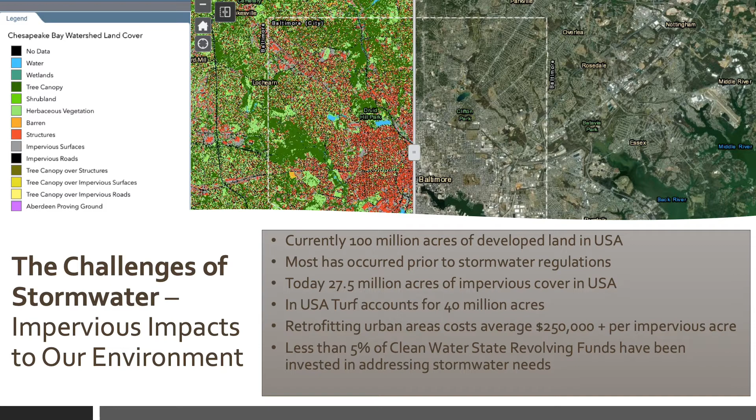With over 40 million acres in the U.S., few would know that grass represents our largest agricultural crop. In the Chesapeake Bay region where I'm located, we have seen a tripling of grass to nearly 4 million acres since 2009, representing 10% of our total watershed area. The millions of acres produce a significant amount of polluted runoff each and every year. This polluted runoff is a result of highly compacted soils, fertilizers, fossil fuels, and irrigation water. This amount of unused grass areas offers tremendous opportunity for biochar to assist communities in meeting their EPA stormwater requirements.

Often when we see green yards and fields, we immediately assume that they have the ability to infiltrate and store rainwater. However, in most cases they provide little infiltration or storage and are often just as much a contributor to runoff and pollutants as the impervious areas. While receiving little attention to date, turf offers a tremendous opportunity to become part of the solution through an aggressive urban soil carbon restoration program that can provide numerous environmental services while saving communities millions of dollars and meeting their EPA stormwater permit.

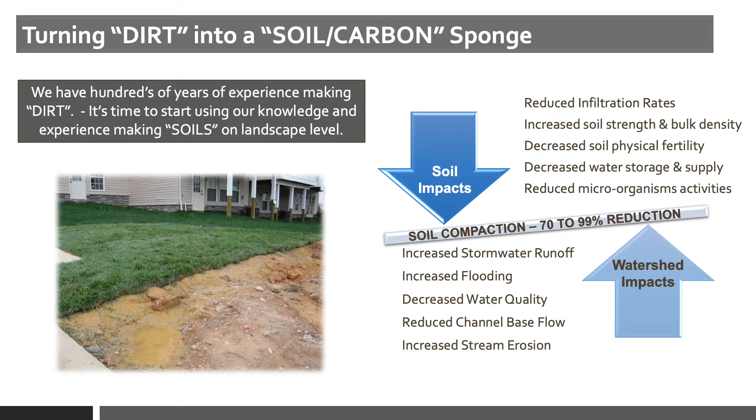I'm going to go out on a limb today and assume that stormwater and green infrastructure might be a new topic for many. As with any industry, we have buzzwords, acronyms, and definitions. Two that should be explained include green infrastructure and hydromodifications. Green infrastructure is the latest buzzword related to stormwater management around the country. Basically, the approach is to manage stormwater runoff using natural systems and/or engineered systems that mimic natural systems.

The objective is that by using distributed green infrastructure, urbanized watersheds shown primarily in scenarios B, C, and D in the slide can be restored to mimic scenario A, woods or meadows in good condition. In order to achieve this objective, the project must first maintain pre-development runoff characteristics of either a meadow or woods in good condition, usually computed through hydraulic modeling, maximize disconnection of impervious surfaces, and use many small non-structural treatment systems.

As our environments become more impervious, the natural hydrology of the watershed is modified, increasing peak flows, runoff volumes, and generating flashy flow events. For scenario D, which is nearly all impervious, much of the runoff flows off the landscape into storm drain systems as fast as possible to avoid flooding. Without the vegetation, evapotranspiration declines, and little to no infiltration occurs, eliminating groundwater recharge and natural cooling effects.

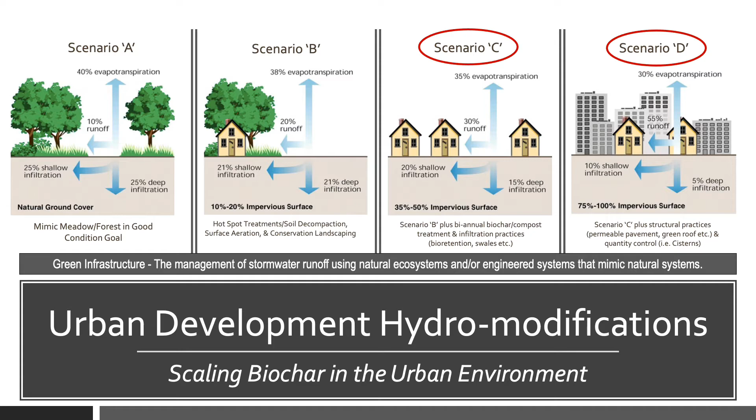Let's now transition to discussing biochar as part of a stormwater management strategy. In the beginning, much of our biochar efforts were associated with enhancement of engineered bioretention media for bioswales, bioretention basins, and rain gardens. In 2012, working with the University of Delaware, we began to evaluate the potential to modify soils in situ to mimic what we were finding in the biochar enhanced engineered media. In 2014, the research team received an EPA and a Transportation Research Board grant to study the potential benefits of amending soils along highway greenways.

The pilot areas were very small, capturing runoff along a 3-lane highway with two 6-foot by 20-foot treatment areas. A third area just captured roadway runoff. Both treatment areas were tilled to 12 inches, or 30 centimeters, with one being amended with 4% by mass wood biochar. Each test plot captured the same amount of impervious area.

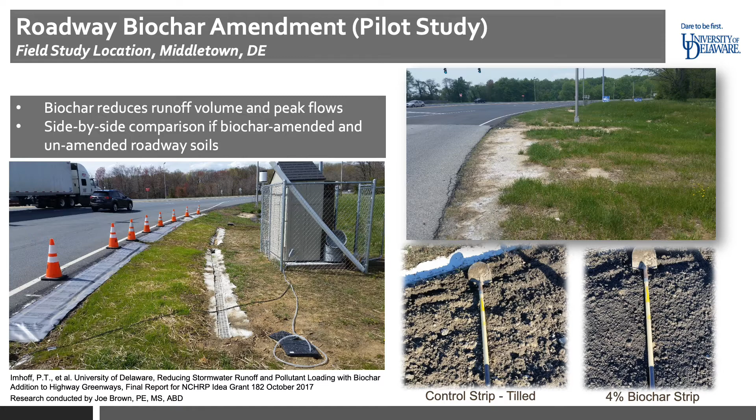After a year and a half of data collection, the study showed significant peak and volume runoff reduction. The biochar amended soils provided an average of 77% reduction in peak flow, while volume was reduced by about 53%. For peak flow attenuation and runoff, tilling provided very little benefit compared to the addition of biochar for the sandy loam soils. As would be expected, study results will vary based on soil types.

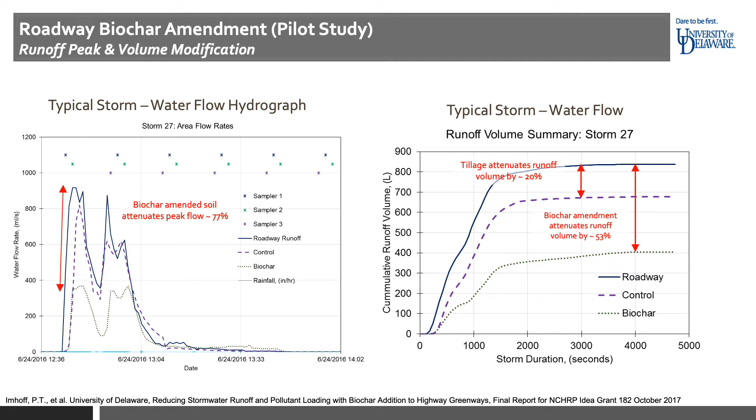Currently, the University of Delaware is working on a soil biochar model to better determine the amount of biochar to be used and predict how it would respond in a given soil.

An exciting aspect of the study, based on data collected from 84 storm events, was the ability to capture 100% of the runoff from 85% of all the storms that occurred during the study by amending just 12 inches.

An interesting finding from our efforts was that only 9 inches of the amended soil were actually being used to capture the majority of the storm events, and only during bigger storms were the remaining 3 inches used, which then became surface flow. This was discovered during a mass balance quality control check and confirmed using multidimensional flow modeling by an independent team.

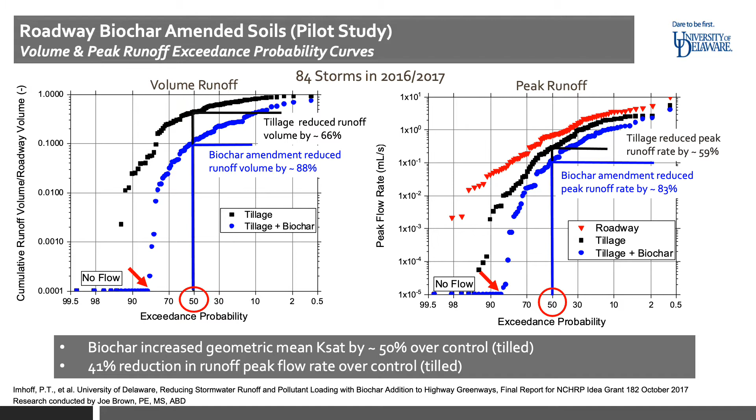One of the coolest findings during the study was the effect of biochar on soil temperatures. The addition of biochar into the soils helped to moderate the overall soil temperature extremes. Based on literature review, it appears the soil temperature moderating may be due to the combination of increased water holding capacity as well as microbial activity.

The results indicate the soils warm quicker and cool slower, temperature extremes are limited, and more extremes can be found in the spring and summer than in the fall and winter.

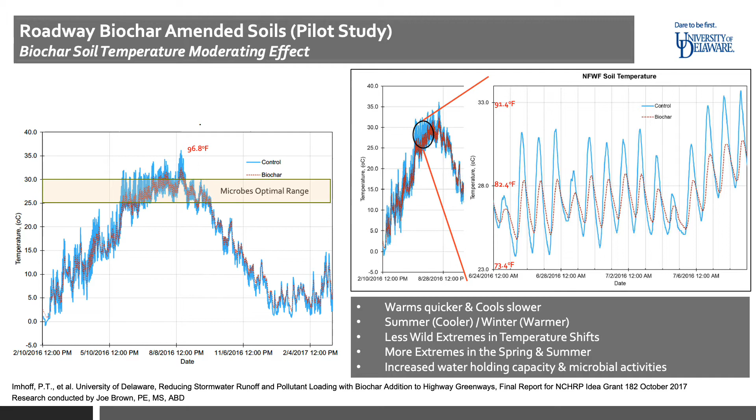Upon completion of our first highway pilot project, efforts moved to the installation of larger demonstration projects, primarily along highways for a variety of transportation agencies.

The I-95 Toll Plaza project was recently installed for the Maryland Transportation Authority, led by the University of Delaware and construction partners this past summer. As part of the effort, means and methods for installation as well as material specifications were developed.

Lessons learned from previous installations incorporated a number of additional steps. One such critical item is that biochar must be moistened and allowed to absorb water prior to tilling into the soil, or it will not incorporate evenly throughout the entire soil profile and will primarily remain on top. Adding the moisture also helps reduce biochar dust, which is critical for safety, especially along busy highways such as I-95.

The other change we made as we began to scale up operations was the use of a specialty harrow tiller. Most rotary tillers can only go down 4 to 6 inches and will pull up a lot of rocks. The power harrow is able to get down to 11 inches and minimize the exposing of rocks while blending moist biochar into the entire soil profile. The harrow made the installation process go quicker and provided for a cleaner final product.

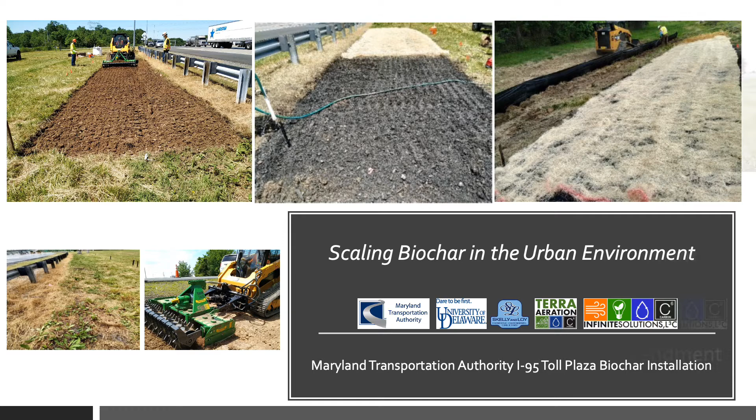To date, the largest biochar project we have done was the conversion of a third of an acre of grass to an infiltration basin. Within the basin, the soils were amended down to 2 feet to better capture runoff from an 8-acre drainage area with a 3-acre parking lot. In order to get the highest performance credits, the amended soils needed to function more like an engineered bioretention media, which averages 80% sand, and have it infiltrate without the use of underdrains.

The project is heavily instrumented with a complete weather station including rain gauge, relative humidity, temperature, wind speed and direction, evapotranspiration, and solar intensity. Groundwater surface wells were installed to monitor the rate of storage as well as time to completely infiltrate. The soil moisture and temperature probes have been installed at 6 and 12 inches, both in the amended and non-amended soils.

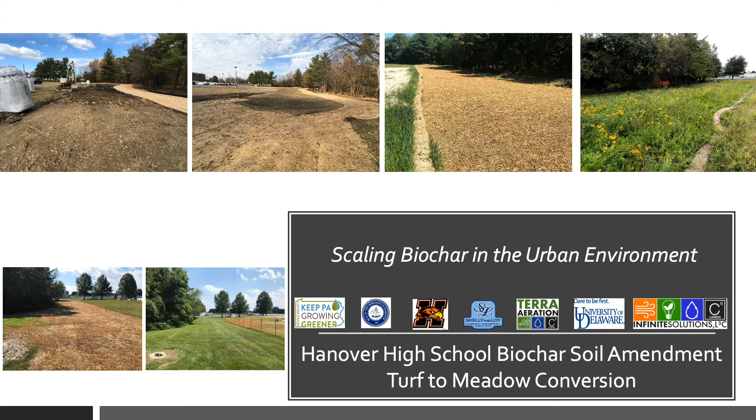As we continue to add to our project experience, we have been experimenting with installation processes to cover a variety of situations and of course make it as efficient and cost-effective as possible. As it relates to treatment and equipment usage, there are 3 primary techniques currently being employed based on the amount of water management we're targeting.

Surface treatment for non-hotspot areas uses a very common turf management strategy to increase infiltration, aeration, and turf health. It is recommended that biochar or a blend of biochar, compost, and fertilizer be spread after aeration. This is important to consider to ensure that the turf remains an even color and thickness throughout the site. This treatment allows for more infiltration, water holding capacity, and nutrient management right at the root zone.

To infiltrate larger storm events, like a 2 to 5 year event, then the deeper harrow tiller must be used. On most projects, the average amount of biochar has been 4% by mass, but we are currently testing effectiveness of using only 2% by mass to see if we can get a similar result for less cost. Depth of treatment can also be easily adjusted with the harrow and makes quick work of soil amending and turf replacement. Lastly is the pneumatic soil decompaction technology.

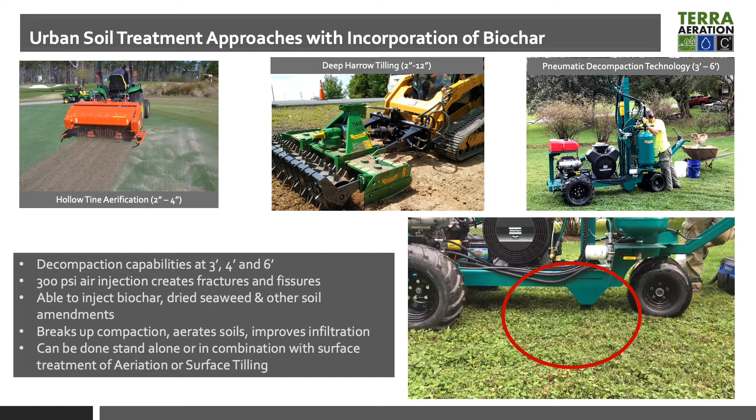I'd like to see if I can get a video to play so you can see the equipment in action. Let's give it a little bit of sound. Get the real effect. As you can see, the ground lifts up at that point after the air was injected.

As part of our work, let's now take a look at how scaling up biochar and urban soil restoration can have a major impact on a larger watershed scale. At this time, we are in the early stages of scaling up from pilot and demonstration projects. So obviously, the more projects we get under our belt will yield more data on the effectiveness of urban soil restoration practices. However, based on what we have learned to date, we can take a hypothetical view using similar modeling studies to evaluate biochar's influence beyond a pilot site level.

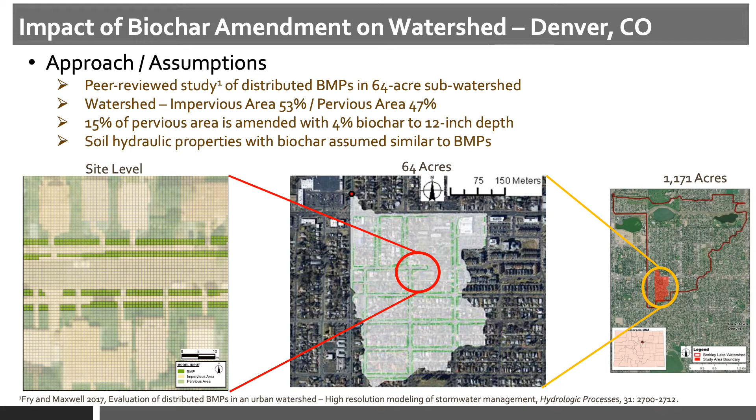A recent paper by Fry and Maxwell provides a similar framework to look at the potential benefits of a broad-scale urban soil restoration program. In the original Fry and Maxwell study, existing poorly drained soils were removed and replaced with sandy loam mix. Our evaluation took this approach and modified the data, assuming the addition of 4% biochar treating 15% pervious area.

At a site level, impervious disconnection is paramount to achieve runoff objectives. The research models have demonstrated that the most effective practices include downspout, sidewalk, and driveway disconnections, deep soil decompaction, and green patches often found between the road and sidewalks.

Additionally, most houses are graded to drain toward the public roads, thus increasing the volume of runoff that has to be managed by community infrastructure. Thus, short-circuiting those flow paths will have a major impact on the total runoff from the site.

Studies have also shown that most individuals do not want to give up their grass for green infrastructure practices like bioretention facilities, rain gardens, or even conservation landscaping due to maintenance and loss of space or the perceived loss. Yet, for municipal engineers and regulators, these green practices are the primary tools for on-lot treatment. Additionally, considering the majority of the available land is privately held, there is no way to mandate their acceptance.

Access to these private properties can be difficult, and so more innovative approaches are needed to gain access to these areas, like maybe a stormwater fee elimination and/or a subsidy/tax credit towards a brand new yard. Investing in increasing the ability of a lot to infiltrate and hold more water through the incorporation of biochar has shown great promise at a smaller scale, and we have no reason to assume different results when scaling up.

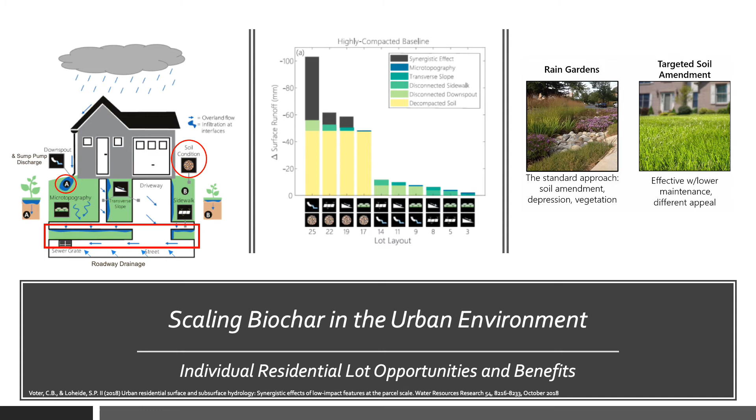An additional selling point to landowners and community leaders is all of the other benefits, including reduction in water usage, waste upcycling, carbon sequestration, microclimate temperature management, contamination capture and treatment, and nutrient management.

Based on the results of the hypothetical analysis, the use of biochar in urban soil restoration can provide treatment of 8+ acres of impervious area to every 1 acre of biochar amended soils. Assuming the treatment of only 15% of pervious area in the right location at critical hotspots would cost between 2 to 3 million. Pneumatic soil decompaction and full yard treatment would be an additional cost.

By comparison, using the EPA's $250,000 per impervious acre treated, the community would be looking at over $8 million using green infrastructure systems such as bioretention basins and rain gardens that most homeowners do not want to have on their properties. This price doesn't include the long-term operations and maintenance costs.

As with any new approach, prices are generally higher at the beginning. Currently, much of the costs are tied up in biochar and transportation. This is due to the lack of production in different regions of the U.S. If biochar production could be scaled up regionally, it can be assumed that the prices of installation would come down in the cost per gallon stored or treated.

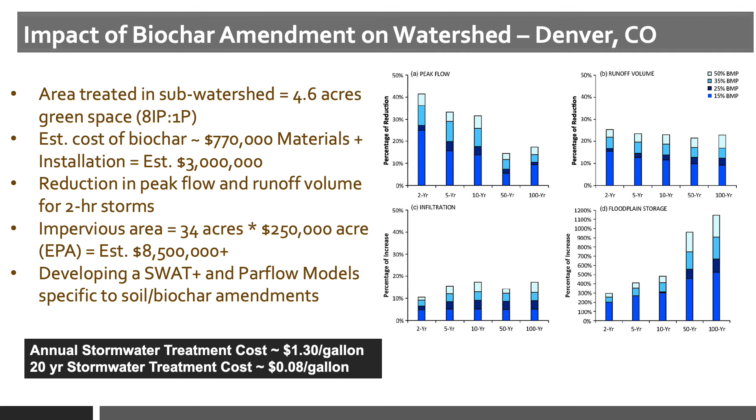Currently, the University of Delaware is working on developing a reliable hydrology model that is able to predict the influences of biochar on a larger watershed scale basis. In closing, the opportunity for scaling up biochar on a national level is enormous. I have focused heavily on stormwater markets as a lot of money is being allocated to meet the EPA's permit requirements.

The environmental benefits for communities having to meet these requirements are immediate and offer considerable cost savings over other stormwater management practices. Communities that invest in an urban soil carbon restoration program can avoid having to acquire property from private citizens, squeeze more out of what the community already owns and has access to, better adapt to climate change impacts, and protect against long-term inflationary O&M costs.

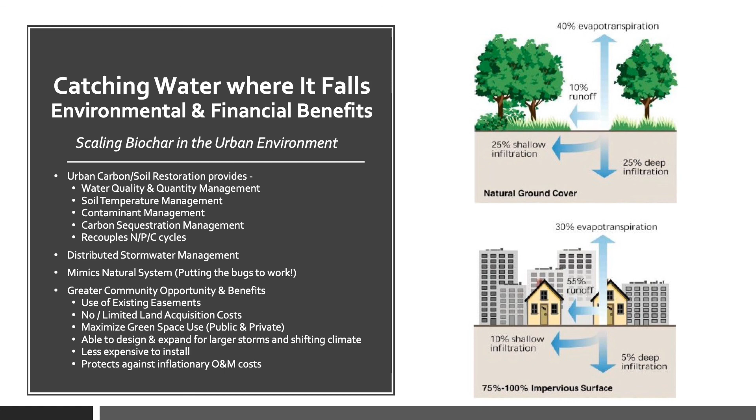One aspect that is guaranteed when implementing this type of program is that there always is and always will be grass farmers interested in tending to the community's newest stormwater practice, whether they recognize it as one or not. Various techniques or treatments to maximize soil rebuilding benefits with a major focus on water capture.